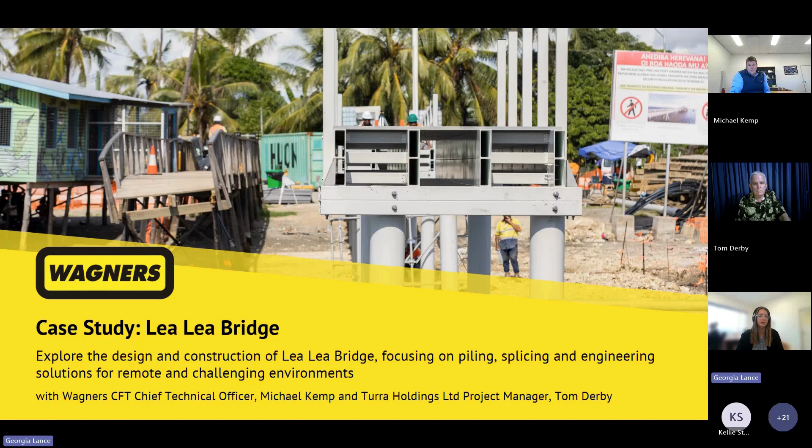Tom is a civil engineer who has been involved in various civil engineering disciplines on both contractor and client side, constructing roads, bridges, ports, airports, coal-fired and hydroelectric power facilities, remote hydrocarbon exploration sites in Papua New Guinea, and other construction projects across Australia and Papua New Guinea. Tom is currently working as a consultant for Turra Holdings Limited, the shareholders of which are the umbrella landowner companies for the upstream and downstream facilities of the PNG LNG project, operated by ExxonMobil.

Tom has been involved in the Lea Lea Bridge design and construct project since contract award in March 2024 and worked closely with Wagners CFT during the design and procurement stage. He was also directly involved with the successful construction of the bridge in April to June 2025.

Michael is an ambitious CTO and business unit leader with more than 20 years' experience at Wagners, where he has spearheaded significant growth and innovation. Currently, he oversees Australian operations for Wagners Earth Friendly Concrete and is focused on expanding EFC into international markets. Michael is also responsible for the global growth of Wagners Composite Fibre Technologies and the technical development of new products. With a Bachelor of Civil Engineering from the University of Adelaide, Michael combines his tertiary qualifications with deep expertise in business processes, strategic development, and product innovation.

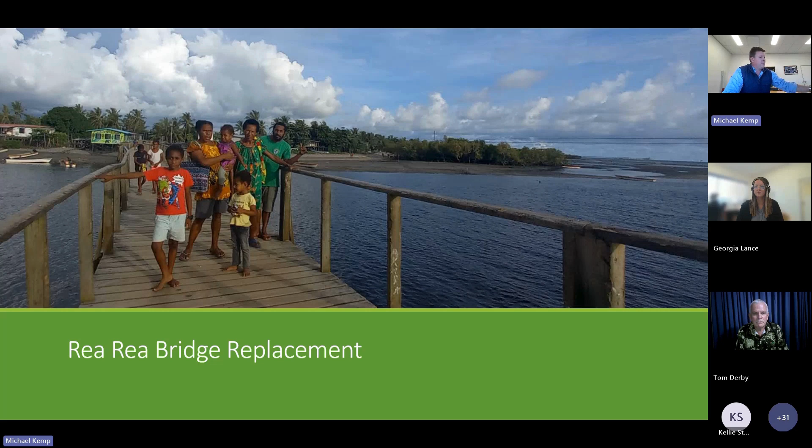So today we're going to talk about basically a case study of a project in Papua New Guinea. As a bit of background, Wagners has been developing our fiberglass walkways for many years, probably a 20-year period, where we started with very short footbridges in Brisbane, and we've now extended that to some fairly significant structures around the world.

Just an example of some of those in the lead up to this project that we've used as precursors. So, this one's at Southwest Rocks in New South Wales, replacing a timber structure with a fully fiberglass structure. The timber structure has since been taken down, where we used bonded members as girders and handrail posts, but on existing steel piles.

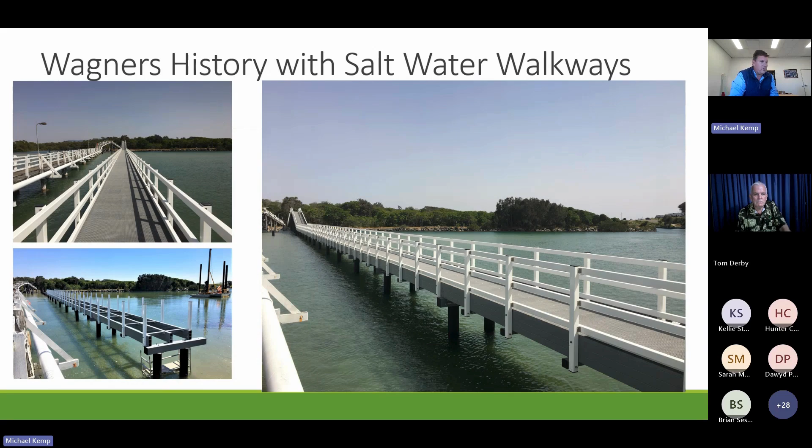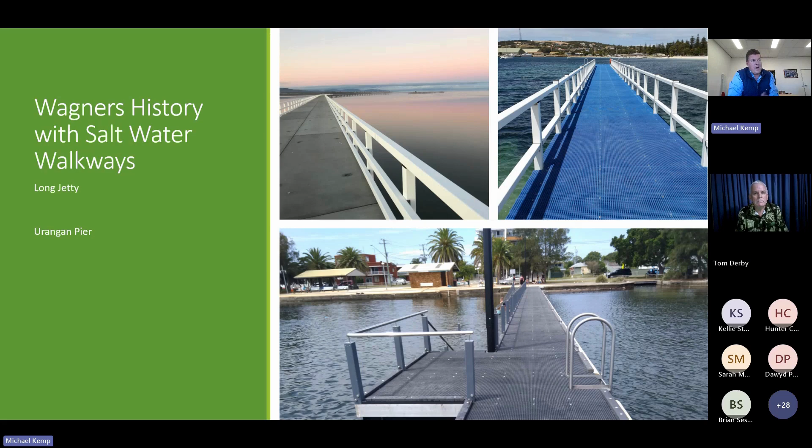And again, many other similar smaller structures around Australia with our handrail systems and substructure systems, and through to some fairly significant structures. So this is the Elizabeth Bay Marina in Sydney, where from an aerial view, you can't see any of our composite product, but underneath all of that timber decking are fiberglass beams holding up the whole platform.

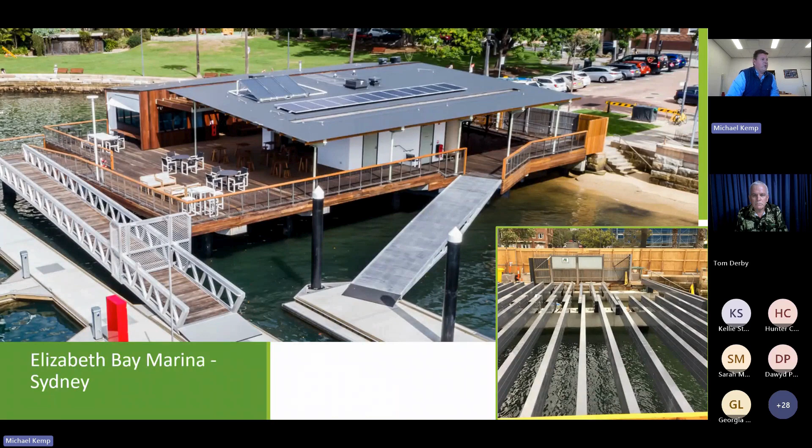So with a lot of experience in taking composite materials, which are the right material for the environment, corrosion-free, lightweight, and generally easy to install over salt water, we'll now progress to Townsville, probably our most recently installed over water boardwalk. And this one, I just wanted to point out there's a really great webinar done by the installation crew with some great time-lapse footage of it being installed as well. So that's available on our website.

So through to the current project, I'll hand over to Tom to give us some background on the structure. And then we'll come back to me for some design work, and then back to Tom for the installation that he coordinated. Tom, I'll hand over to you.

Okay, thanks, Michael.

Yeah, so the original Lea Lea footbridge was constructed in 2012 under an ExxonMobil tax credit project. And while they did a really good job of the decking, the support structure wasn't the best, and they had poles that were fairly inferior quality. The structure is across the Rea Rea inlet, which is around 40 kilometres west of Port Moresby in Central Province.

So you'll see we have Rea Rea and we have Lea Lea. So apparently an expat came to the area many years ago and misheard the name of the village, and it's been called Lea Lea ever since, but it's actually called Rea Rea. So there's a bit of a campaign to get it back to the original name. So that's why there's a bit of a mix and match on names there.

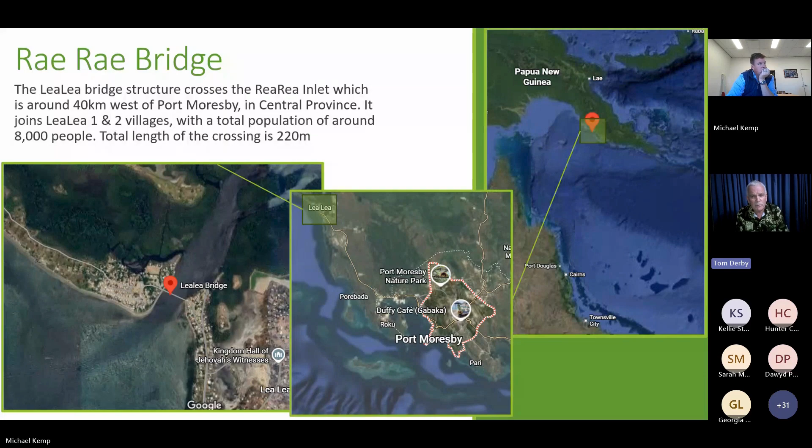However, they did an excellent job. They built a temporary structure just with local labour. They got mangrove poles, used the existing deck structure, and in about 5 or 6 weeks they built a temporary structure, which allowed the locals again to cross over the bridge site.

A bit fortuitous for us, this bridge structure collapsed about 2 days before we actually started construction, and that made construction for us quite a bit easier. Unfortunately, the locals had to go back to the ferrying method again.

We did speak to the locals about what sort of structure they wanted as a replacement. They insisted they didn't want any vehicular traffic in their village, and they wanted to stick with the footbridge structure. So, going with that, we decided on a 2-metre wide deck, which is pretty similar to what was there originally.

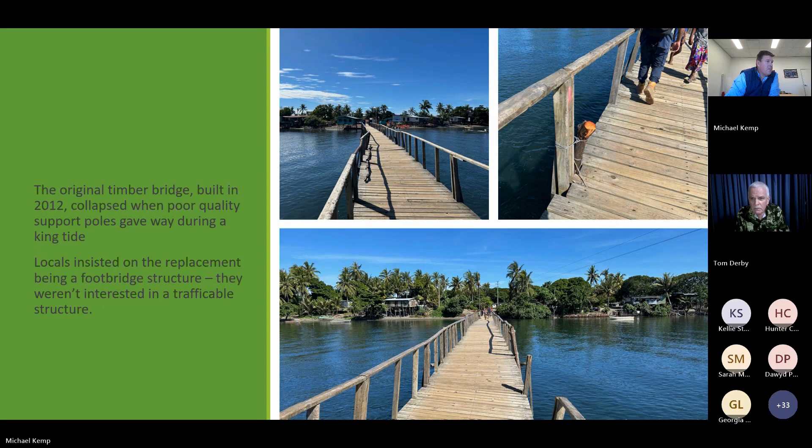If we can maybe go on to the next slide. So the Department of Works contacted Turra to put together pricing for a design and construct solution for the replacement bridge. And the project, again, is being funded under the ExxonMobil tax credit program.

We had a gentleman who's been in Papua New Guinea a long time, and he's a consultant to the Department of Works, and he'd heard of the Wagners product, and he suggested we contact Wagners and get something underway. So Turra contacted Michael, and a proposal and pricing were put together.

Papua New Guinea, for probably the last 10 years, has had a real problem in foreign exchange. To get foreign exchange to buy products from outside Papua New Guinea, there can be a waiting time of anything up to 6 months, depending on the size of the order. So because of that, we went to look at an internal supplier who provides timber decking.

So we put together a proposal and pricing, which involved steel piles and steel superstructure, which again had to be imported, but the timber decking would have been locally manufactured. We took that to the client, the Department of Works steering committee, and they agreed that the Wagners CFT solution is much superior, mainly due to minimal maintenance requirements.

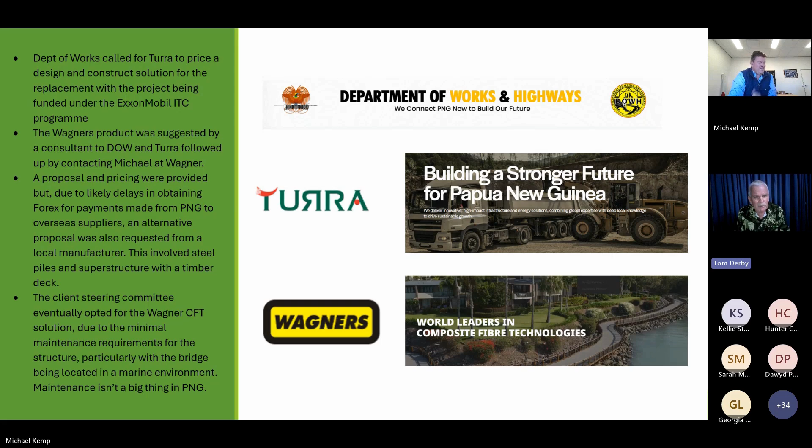Maintenance is a huge problem in Papua New Guinea. There's 800 languages in Papua New Guinea, and none of them have a word for maintenance. So the fact that it's in a marine environment made that even more important. So we can have the next slide, thanks. Okay, so I think this is on the detailed design, and I'll hand back to Michael.

Thanks, Tom. So after we got through a tender process and Wagners were commissioned, we got straight into the detailed design phase. The first thing that we were looking at, even probably before commissioning, was just what type of structure is going to best suit the location. So really from our first contact, we were considering what type of structure, what spans are we looking at particularly. So we were able to put together ballpark cost estimates based on different configurations.

So we were able to put together an order of magnitude cost estimate based on a series of those spans for the length of the structure, and then the same, but based here on a 24-meter span. Typically we're operating from 6-meter to 30-meter span configurations at CFT regularly, and we're looking to push that envelope on larger span structures. But the bulk of our work today is in that range.

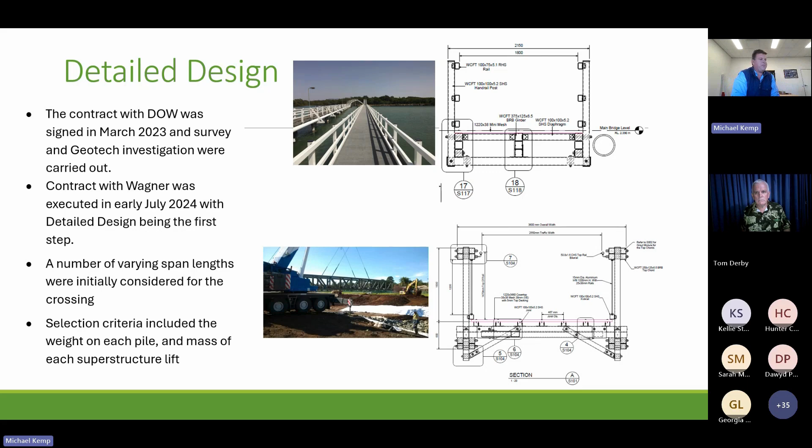The design criteria: Tom mentioned that we weren't looking at vehicular loads. Where we ended up was using what we knew about Australian codes. This was our first job in Papua New Guinea. So some of the changes, we had to look at the local, you can see there, Papua New Guinea specification 1001. We had to look at the local requirements.

We ended up engaging Kramers, an engineering firm that has offices here in Brisbane, but also very local in Port Moresby. So good familiarity with both, to take what Wagners knows well, which is certainly Queensland and Australian design criteria, and correlating that with the local requirements in PNG. But at the end of the day, very similar to what we would do on most of our structures.

So a 5 kPa pedestrian load, now it's pattern loading, so it could be 5 kPa on any individual spot, and then a 1.4 kilonewton point load. The wind conditions were from the Papua New Guinea spec. We also had to consider earthquake in PNG, which is considered on occasion in Australia, regularly in New Zealand, but not so much in the Australian condition.

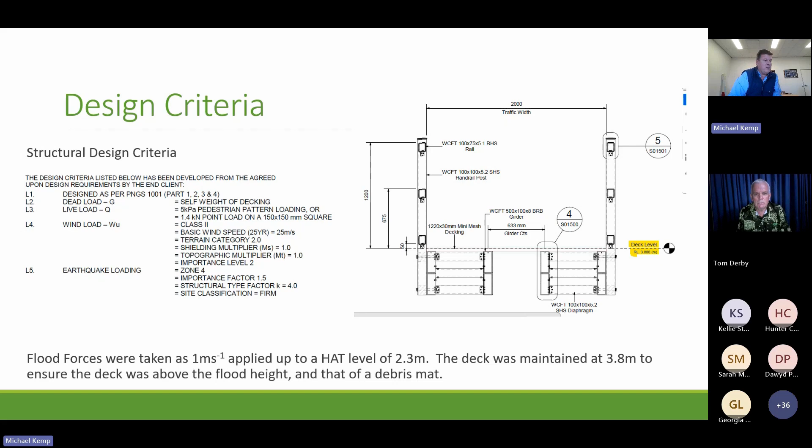So a bit more detail here. Again, you can see the 500 girders, diaphragms. So we use diaphragms in bridges generally to help our handrail loads. So when we get a horizontal load applied to the top handrail, we have to limit the deflection of that handrail by the codes. And if you just have that post attached to one girder only, it does allow a rotation, and a small rotation in the girder creates a large deflection at the top of the handrail post.

So we try to effectively brace that external girder with a diaphragm. So we're connecting 2 girders together, and that restricts the rotation of that outside girder, and therefore really helps with the deflection at the top handrail post. So typically you'll see on our structures that diaphragms are at or very close to handrail post locations, and that's why.

We also determined, and this was more of a functionality point of view from an installation, that we didn't need diaphragms to go across the full structure. Sometimes we'll put them across the whole structure to, I guess, connect across the full width. But from a practicality point of view and in discussions with Tom, we wanted to prefabricate the main beams here in two halves. So we've got basically taking them with the diaphragms pre-assembled. It also matched the amount that could be lifted with the cranes. So we really tried to think about how it was installed as we're designing the project.

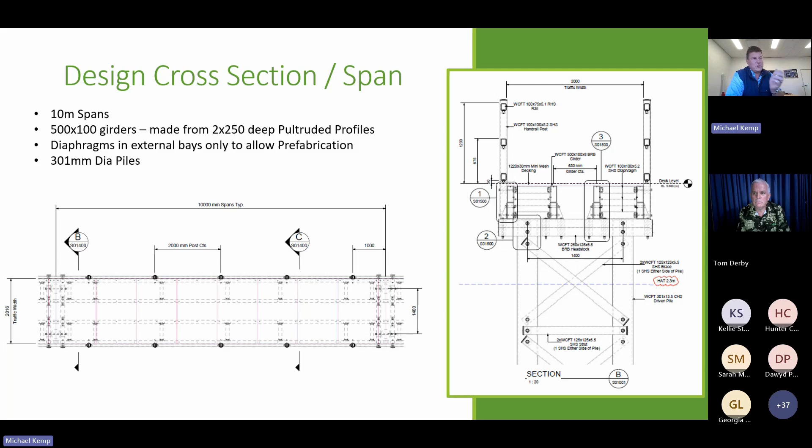So we're applying the load at 2 points, where you get a constant moment region in the middle, and very typically, I guess, we didn't get a tension failure or a flexural failure. Our failure mode ends up being a local compression buckling underneath one of the load application points. So bear in mind that for a pedestrian bridge only, no vehicular load, the failure load of one of our girders, we've got 4, was about 14 tonne as a point load. So they're significantly strong.

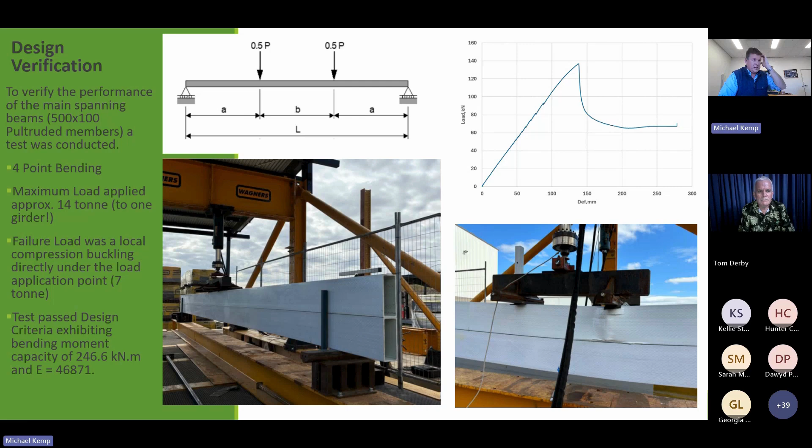Now, this is the same as steel. It's the same as any other construction material that's used against known standards. So we're not being ultra conservative. It's more of a risk thing. It's making sure that your product does what the standard says it will do. So if you take any of Wagners' products and test them, they should achieve a higher number than what's in the design guide.

Going on to design for installation. So we always had the capacity to splice our piles. One of the key issues with piling is that you never quite know what you're going to hit. The geotech report was taken slightly upstream from the exact location that we were working off. So we initially had quite a few questions between Tom and myself on how we're going to handle the piling.

There were reports of a deep layer of silt, which initially we thought we wouldn't be able to get any capacity out of. When we got to site, that silt layer was not there. So that was probably upstream where the test was taken, but not where we were. So we did design the piles with splicing in mind. And I mentioned earlier how with the superstructure, we were looking to manufacture it in two halves.

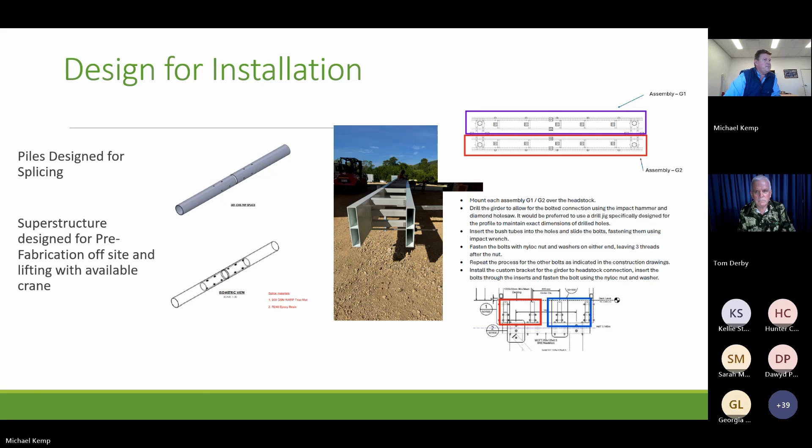The mass of each lift is generally a key thing, particularly over water, or on a more remote site where you're governed by the available crane. If you're in the middle of Brisbane or Sydney, you might be able to call in a big crane for a big lift just because of availability. But often if you're outside of these centres, you've got the crane you've got, and we try to work with that and design a process that allows those cranes to be used. I'll hand back to Tom to discuss installation.

All right, thanks, Michael. So installation, as we say, was based on the geotech report, and it was Michael that recommended that we should go down with an undersized drill, and we finished up buying a 250 diameter auger that could go down a maximum of 9 meters. And then Michael recommended driving the piles with either a vibro hammer or impact hammer. So we looked at various options and what equipment we had available.

We had a Kobelco excavator that our subcontractor RMC had, and we based everything around being able to use that with the vibro hammer, the impact hammer, the auger, and also the capacity to lift the girder sections onto the completed headstocks. So we finished up purchasing a side grip vibratory hammer, which turned out to be extremely useful to pick up the piles, maneuver them, put them in position, and drive them down as far as they could go with the vibro hammer. That worked out really well. It was a saver for us.

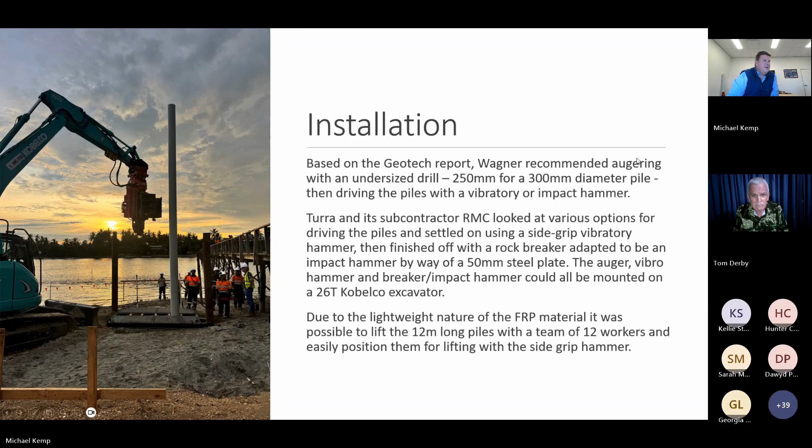So we drove the first two piles on the abutment, and we confirmed with Wagner and Kramer what sort of load capacity was required, and we came up with 15 ton per pile. So we got together some crane weights and put them on gradually. Let one on for an hour, next one on for another hour, and built them up to the 15-ton capacity, left them for 24 hours.

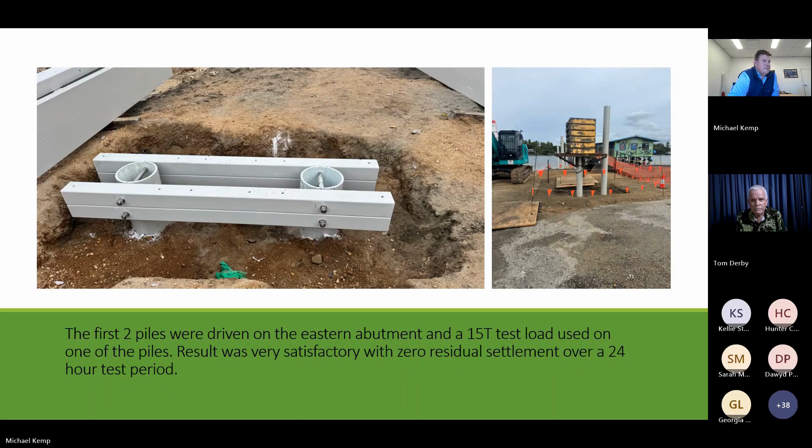Bad connection here at the moment.

But the result was excellent. The pile moved 1 millimeter with the 15 tons on it. 24 hours later, it was taken off and it recovered that 1 millimeter, so basically zero settlement.

We installed the first 5 bents from the beach, just using a frame on the ground, and that allowed us to figure out the installation procedure with the auger, and really the augering was the critical thing. If you get the hole in the right place, then the pile will follow, and we found that all the way through. One of the biggest issues was if we tried to do augering when the tide was really moving in or out, it was a problem. So we had to wait before we could do the augering. But if we got the auger location correct, then driving the piles was no problem.

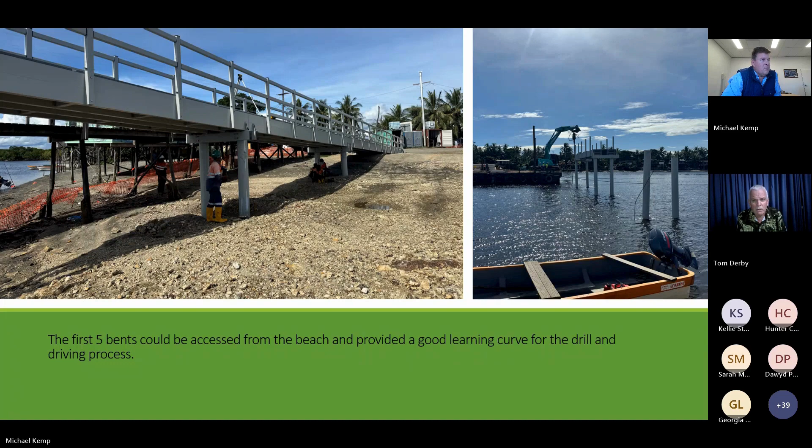And next slide there, Michael.

Yeah, so after the first 5 bents, we had a decent sized barge, 50 by 12 meters, and we moored that. I think we had to do 8 shifts. We could drive 2 bents from each barge location. Our subcontractor came up with quite an ingenious method to set up. You had swiveling arms on each side, 10 meters apart, and that allowed you, even if your barge location was slightly out, a fair bit, 2 meters probably, you could adjust the swiveling arms to set up the correct location for the piling.

Tom, could I just ask a bit of a question on that? Is that the swiveling arm here? I'm pointing, hopefully you can see my mouse. Is that the swiveling arm there that you're referring to? Yeah, it goes right back. You see, it's got a large, I think it's 200 diameter pin there. So each one is pinned there and goes out, and you can just move them back and forward to suit. And then that small piling frame is just set up with pile locations, and we were initially using a Topcon GPS unit to do the location, and that just became a bit difficult for various reasons. And we found the best way was just to sight it through, measure from the previous bent.

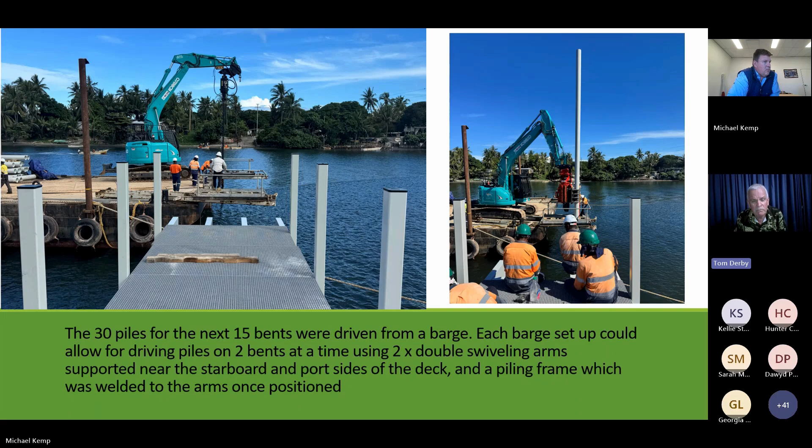Initially, we drove some of them down to 8 meters depth, and we had to splice one bent where we went a bit too far with the pre-drilling. Yeah, so there's the splicing there. And unfortunately, we didn't have any splices there, so we had to leave the decking out, I think between bent 4 and 5 and 5 and 6. We had to leave those out for a few weeks until we got the splices up, and we just kept on going with the piling. But the splices were very simple to put in, external splices with, you can see the bolts, 4 bolts top, 4 bolts bottom, and the opposite axes, and that went very easily, no problem.

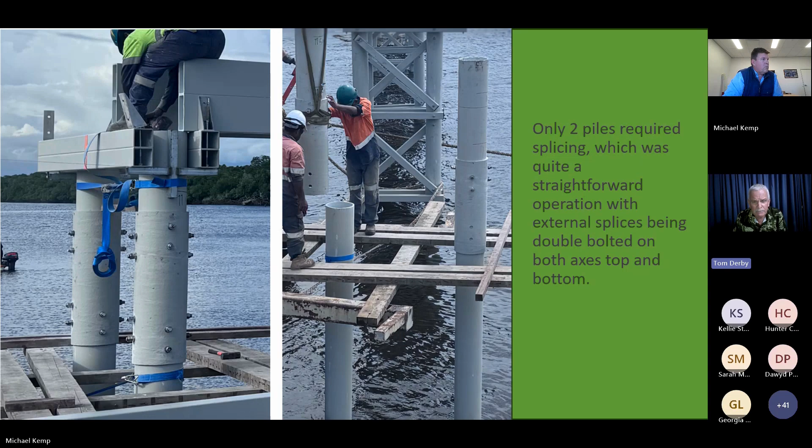So once the 2 bents were driven off the barge, the piles were cut off to the final level. They drilled for the headstocks, and then we didn't have a piling frame that you could bolt apart and pull apart and lift off. In future we'd probably get one, but this one you had to slide up over the piles to get it off.

So we had the holes drilled, headstocks ready, slipped the pile frame off, just put a temporary platform on the swiveling arms, and installed the headstocks, then lifted the beams on, and did that all progressively. So the barge would sit there, get the headstocks in, put the beams on, all ready to go, and then move round to the next position.

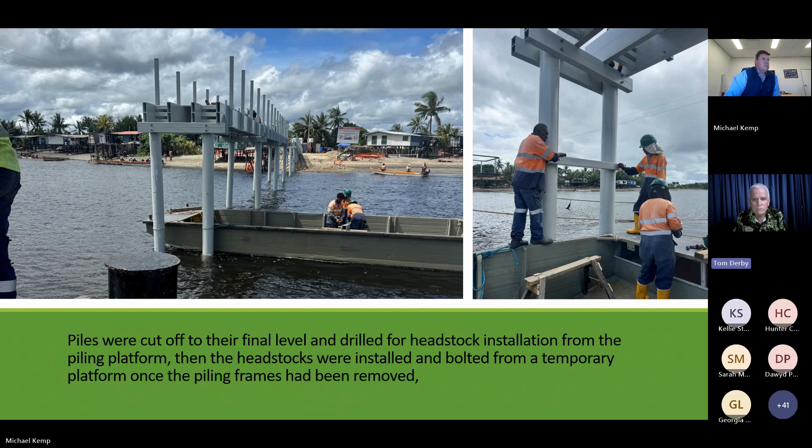So as Michael has said already, that's a pre-assembled double beam section with the handrail posts installed. That was dropped onto the headstocks. Second one dropped in, bolted up, and then the handrails and the decking installed progressively behind the beam installation.

Tom, how did you find making those sections off site? Maybe just give us a quick overview. You had a yard around the bay. Yeah, that's right. So we had a yard about 20 kilometers from the bridge site. We pre-assembled them. I think it's maybe in the next slide, but we had a Wagners technician come. He spent overall 3 weeks, a couple of visits, and explained to the guys how to do all the pre-assembly and then obviously the installation of the headstocks and the bridge superstructure on site.

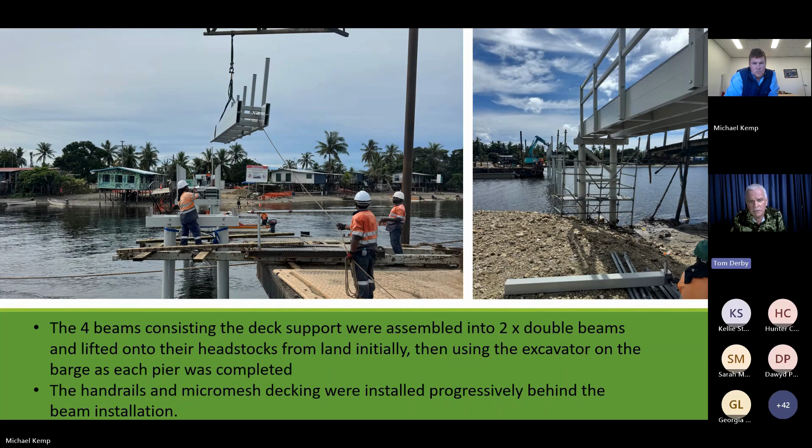So we assembled them off site, put them on a 6-meter truck with a long overhang and drove them up the road to the bridge site. It really worked out very well, and very simple to go together. Once the guys had been schooled on putting all the beams together and the decking and the whole superstructure, once we'd got the methodology over to the boys, they just worked themselves, no problem at all. They did a great job. If you go and look at the deck, it's incredibly straight. It looks really good. As I say to everybody, it's the best looking bridge in Papua New Guinea, I reckon.

Very good. And Tom, I just noticed there is a question in the chat, and it might be the right time to answer it. Could you talk about production rate, like how many piles a day did you drive, or how many spans a day or a week did you install? For the first 5 bents you could easily do a couple of piles a day. Our goal was to drive 4 piles a day, drive the 2 bents off the barge in one day and then spend the next day installing the beams, which we managed on one occasion, but for various reasons, the construction issues you have along the way, we didn't manage it all.

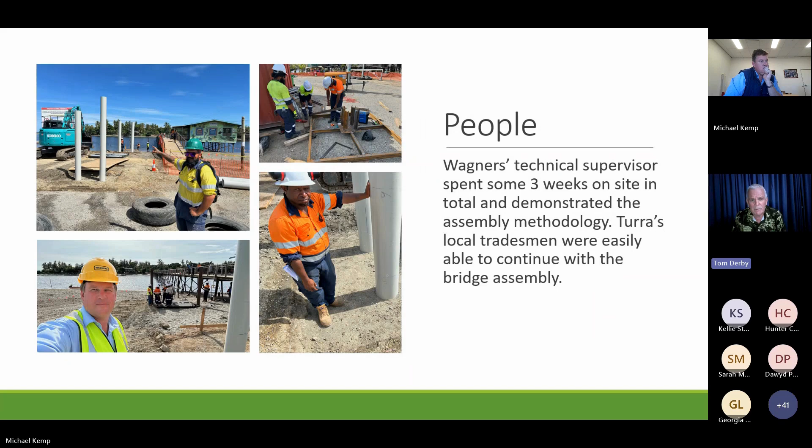A lot of the problems were survey initially, trying to use the TopCon system. We had major delays with getting the piles set out and organising that. Once we decided just to align things by string line and dumpy level, that really improved and got rid of all the survey delays. But once we got into the scheme of things, you could auger and drive 4 piles a day on a good day, and drop in the beams the next day, bolt them up, and relocate.

So looking at this picture, Tom, you're getting a span a day. Is that what you're saying? You drop in 4 piles and drop the superstructure? Yeah, you can on a good day. And if we ever did this again, we could manage that. Obviously you learn a lot of lessons. It's the first bridge of its kind in PNG, and the methodology we used was a bit of a pioneering methodology that hadn't been used in PNG before either. So it's definitely a bit of a learning curve, but if we did it again, that's what you would work on, 1 span a day. Yeah.

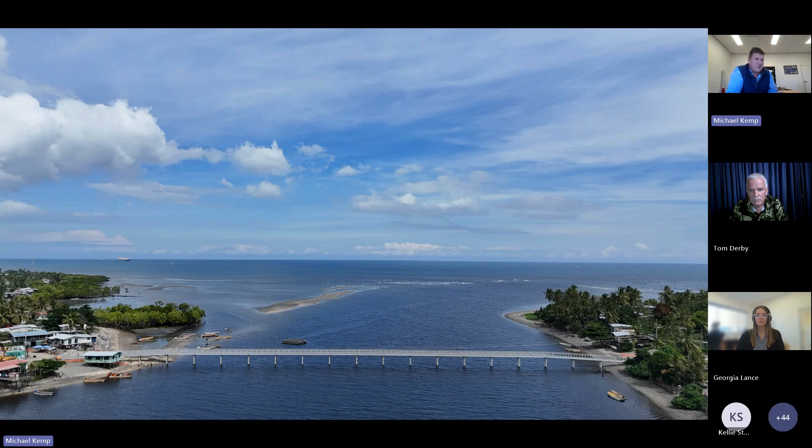And just a finished shot, I guess, to conclude our presentation today. Tom, I'm starting to head your way tomorrow. What can you tell us about the opening and what it might mean to the community?

Yeah, it's bigger than Ben-Hur, Michael. Quite a lot of dignitaries will be there. There'll be a lot of speeches. If you arrive an hour late, I don't think it'll make any difference. So they've got dancing groups, singing groups, and then speeches for a couple of hours.

But it's a huge thing for the community, and they were incredibly supportive. You work in various locations in Papua New Guinea, and it's a nightmare. You just get held up every second day. On one of the jobs we're doing up in Hides at the moment, you get shut down every day. So the community were incredibly supportive. Obviously, it's a great advantage for them having a bridge that will last them for 50 years plus. But yeah, they were incredibly supportive.

We employed quite a number of additional people than we probably would have done in a normal project. We used a local women's group to supply lunches for all the workforce. So I think that's Turra's philosophy. We try and do as much as we can, whichever location we're working in, try and provide as much opportunity for the local people as we possibly can, and try and leave a bit of a legacy.

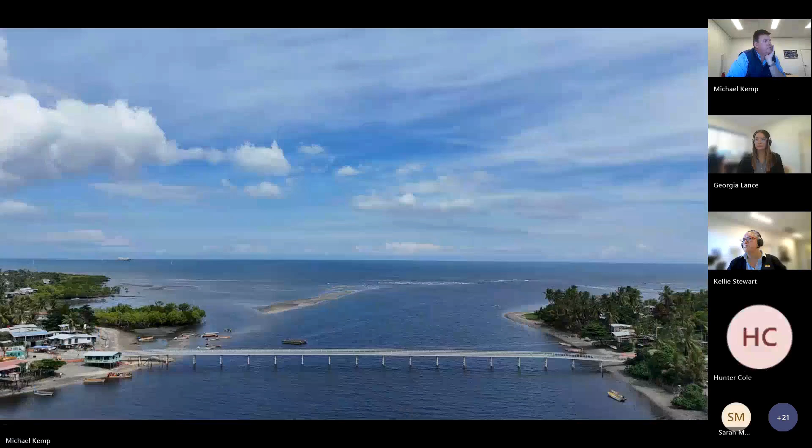Sorry, Kellie. Sorry, Tom. I guess we should just say this isn't a major river system. It's really an inlet. So the debris coming down through there is relatively limited. The biggest issue is the speed of the tidal flow. It does go quite quickly on the outgoing tide. Once it gets down to about half tide, it's moving fairly quickly. But debris-wise, it's not so much of an issue. What was LAT, Tom? What was that tidal range?

So it goes 0 to 2.3. If you look on the left-hand side of the bridge there, there's a cul-de-sac, a bitumen cul-de-sac, which the locals tell us has never been submerged, and that's at 2.0. So every day you were seeing at least 1.5 meters of tidal movement, right? Yeah, that's right. So it's about 2.3 max. And the velocity that it flowed out was substantial.

I was probably surprised on my first trip that you can see around the piles, you get a bit of an eddy at the backside of the pile where the water's flowing out. So it was a significant flow, hence the 4.5 meter embedment that we required on those piles. Yeah, it was mainly we're trying to resist the tidal forces, more so than the vertical loading.

Yeah, that's right. And we did discuss it before, but the previous temporary bridge that was in there, there wouldn't be a pole that had over a meter embedment, and the reason it fell over was because they rotted away halfway up the pole. So I think 4.5 meters, I don't think we'll have a problem.

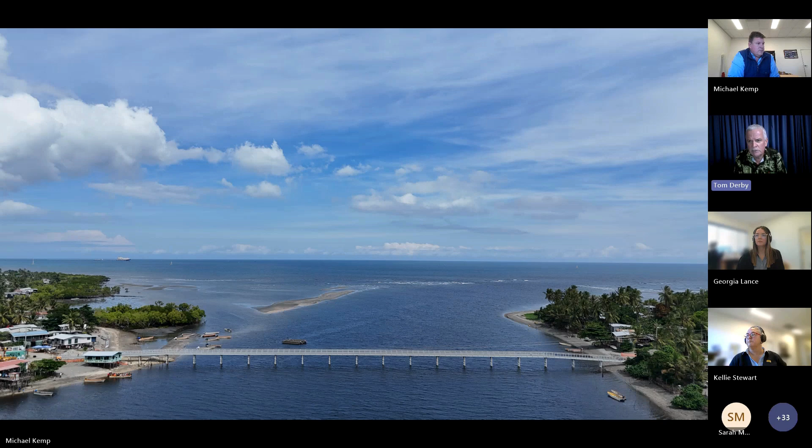We put cathodic protection in, but Papua New Guineans, they just don't have maintenance in their psyche, no matter what you put in place. So it all came down to that really at the end of the day for the selection of the CFT. And especially in this environment, wet, dry, the coatings, and they're going to get boats tied up to the piles, so it's going to be a continual problem. Doesn't matter what coating system you put on. It's a real problem. Great.